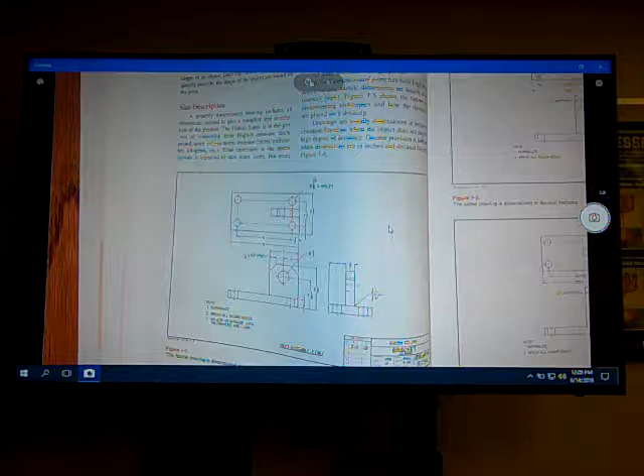Alright, welcome back. Of course, we're going to have a short little video on Chapter 7. Chapter 7 is kind of a big one. We go through quite a bit of content in Chapter 7.

It starts out, as you see on these prints here, there's 3 examples. We'll get to the other 2. They're showing you the different ways that prints can be dimensioned. What I mean by different dimensions, for example, you look at the example here on this page, figure 7.1. These are all in fractions. So it makes it very easy for you to read a tape measure. 3/8 of an inch, 2.5, 1.5.

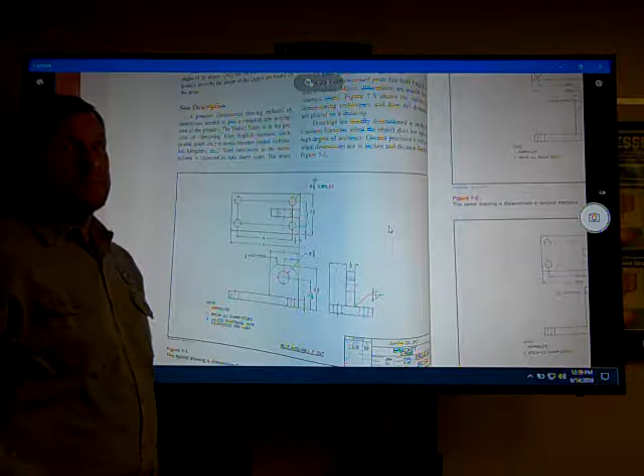You also notice on this simple little print, you see that the diameter of these holes are 3/8 of an inch, and there's 4 holes. So all 4 of these holes are 3/8 of an inch. Also right here you see this half by 45 degree angle. That means it's a 1/2 inch this way, 1/2 inch that way, and it says typical. So what does that mean? That this one here is the same dimension as that one.

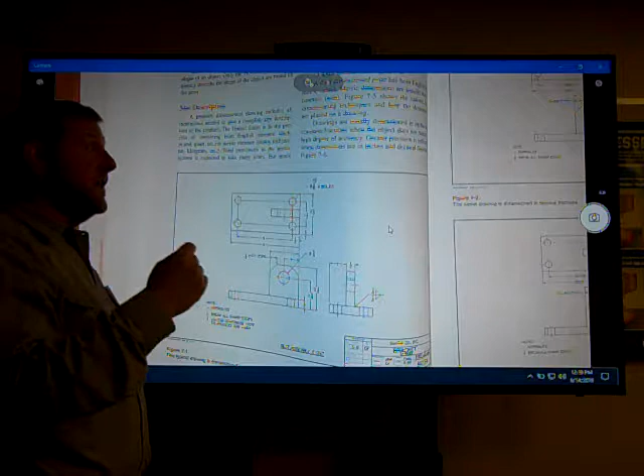When you see that word typical, that means everything else that looks the same is going to be the same as that dimension. You'll see that a lot on your welds. It might be 1/4 inch typical in the tail. You should know that already by your print reading class, and that means that everything on that print will follow whatever's on that reference line or leader. And that applies with other leader lines and extension lines also.

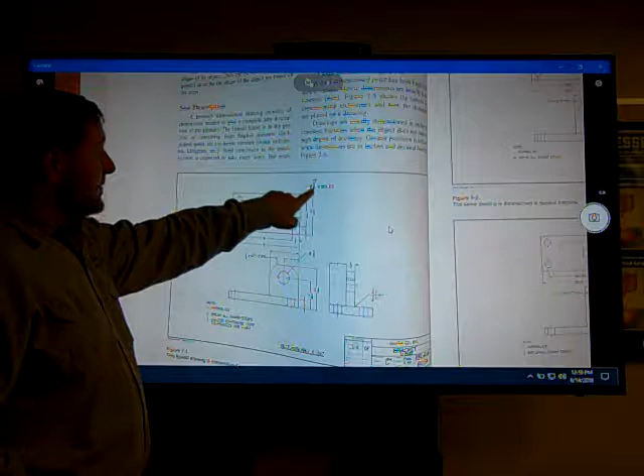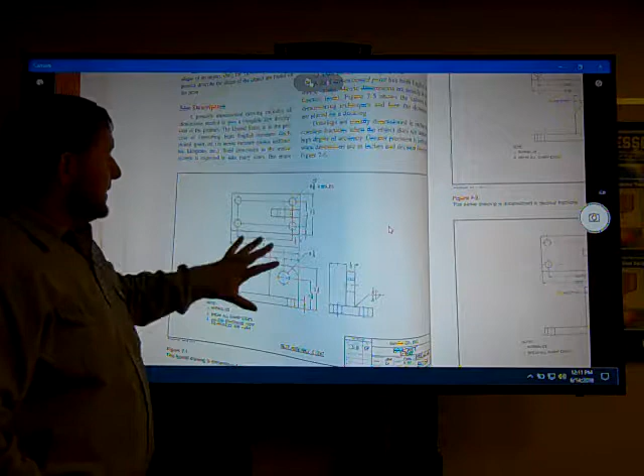So this example right here is showing you that it's using fractions of an inch. Keep in mind that diameter, 3/8, 4 holes, so all 4 of these holes have a 3/8 dimension. This chamfer here, this little notch is 1/2 by 45 degree angle, so it's a 45 degree angle, 1/2 inch both ways. And it's typical, so that means this other side is identical to that side. But this one here is basically depicting that it's written in fractions of an inch.

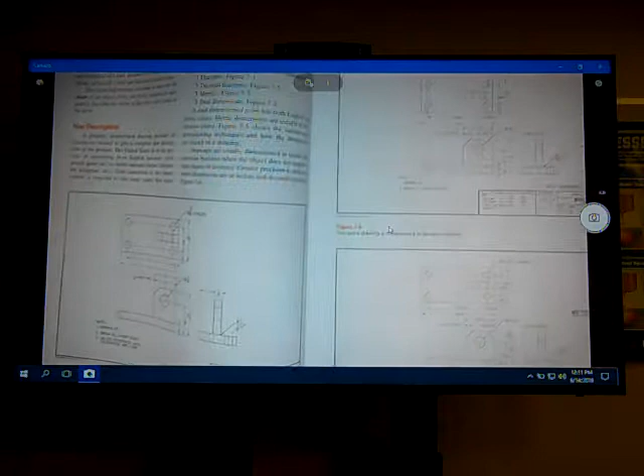As we go on to our next print, up here on top, I'm trying to use examples in the book because that's what you have. We have a ton of examples that we can use, but I figure if I use examples in the book, it should go along with what's being read. So this is the same exact print that's on the other page, except now it's in decimal inches. It's all up to the designer or the engineer to use whatever he would like to dimension. It might be decimal inches, it might be fractions of an inch, however he wants to do it.

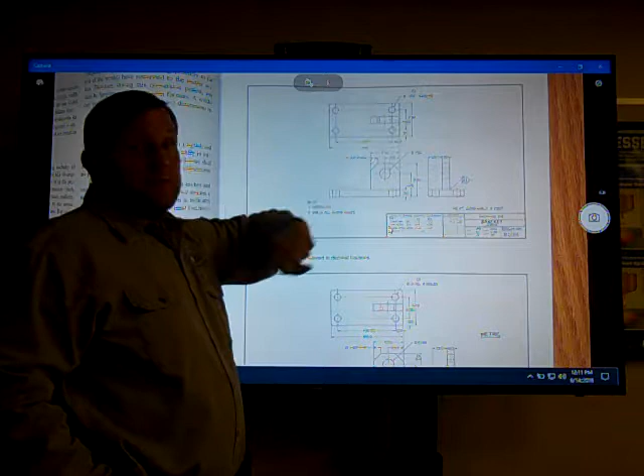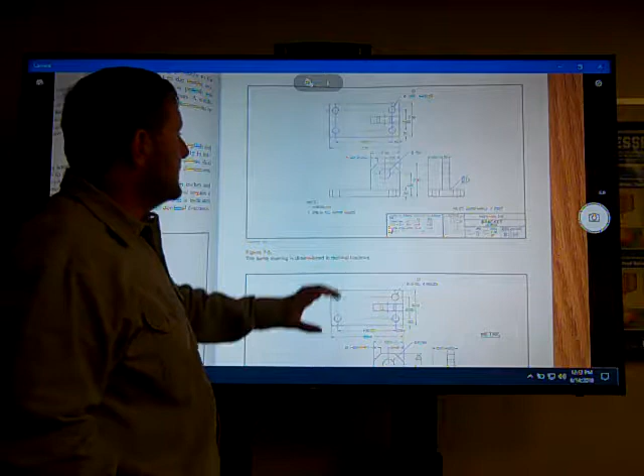So that's why I told you when this class first started to memorize your decimal conversions to fractions of an inch. So this is still 0.375, 3/8 of an inch, 4 holes, same thing applies. Same thing here, instead of having 1/2 as a fraction, they have 0.5. 0.5 is the decimal equivalent to 1/2 inch. So get those decimal to fraction equivalents memorized. You're going to be using them religiously in this class. Some of the prints might be fractions, some might be decimals, and the next example is actually metric.

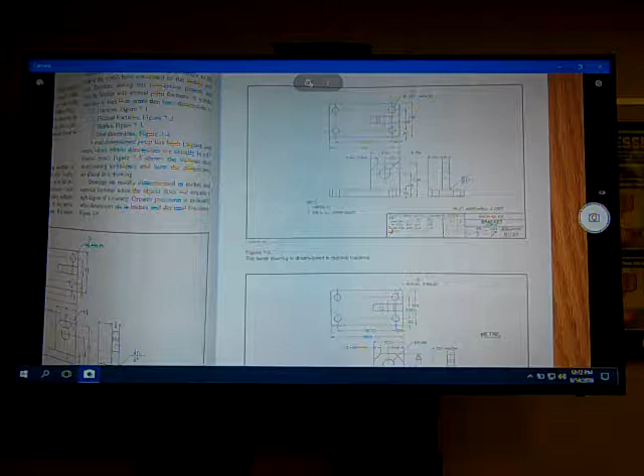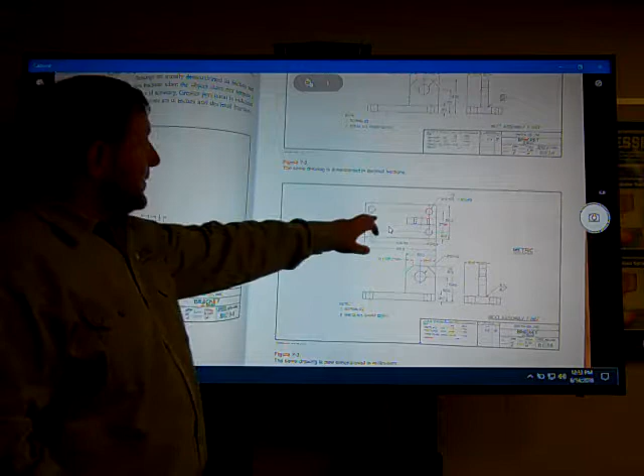So as I move this up, this bottom one here, it's a metric. It all depends on what product you're building and what company you're working for. A lot of our companies in our area use metric because some of their products coming in are out of the United States. So same thing here. So basically what do they have? 10 millimeter hole, 20 millimeters, 37 millimeters. How do I know it's in millimeters? It's usually down in your title block, and we'll get to that later on.

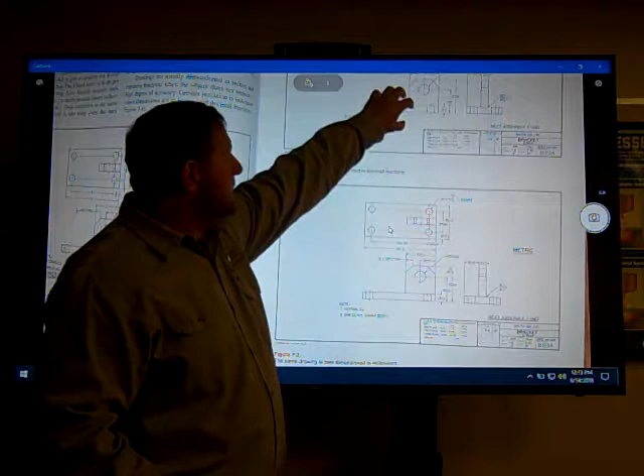But metric, decimal inches, fractional inches. Depending on what company you're working for, you might see all 3, or they might just stick to the decimal. Most of them stick to that decimal equivalent. That's why when you have your decimal equivalent to fractions memorized, it makes it a lot easier on the shop floor.

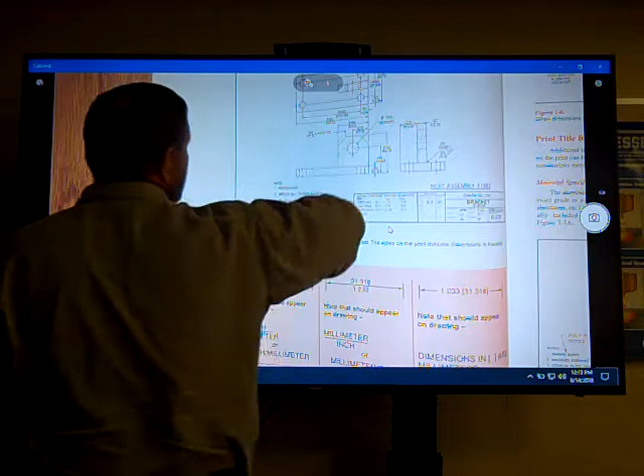The next couple pages we start getting into a lot of the print formatting. This example here on the top is actually an example where they use both. And the very next page, as you can see, they have decimal inches and they have metric right underneath. So that's what they call a dual dimensioning system.

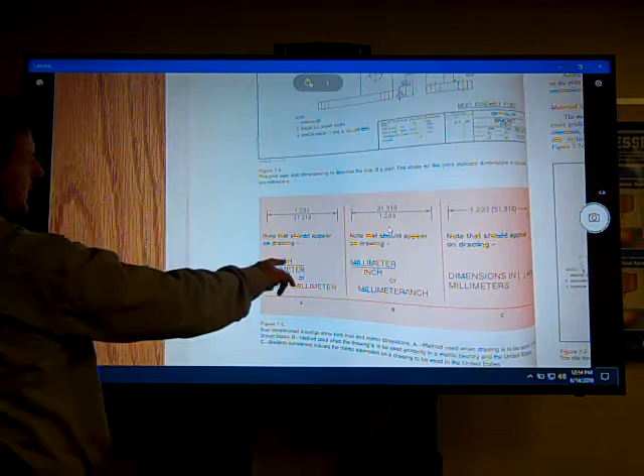When they use the dual dimensioning system, they're going to tell you what is on top. That's what the bottom of the page is telling you. For example, inches on top. So when you see this in the title block, inch on top, millimeter on the bottom. So 1.233 inches or 31.318 millimeters.

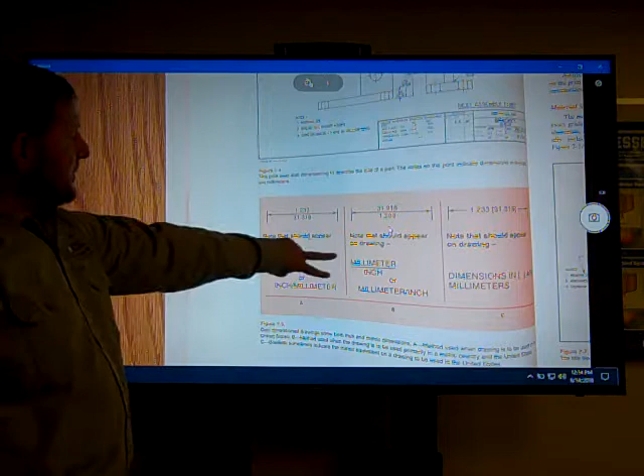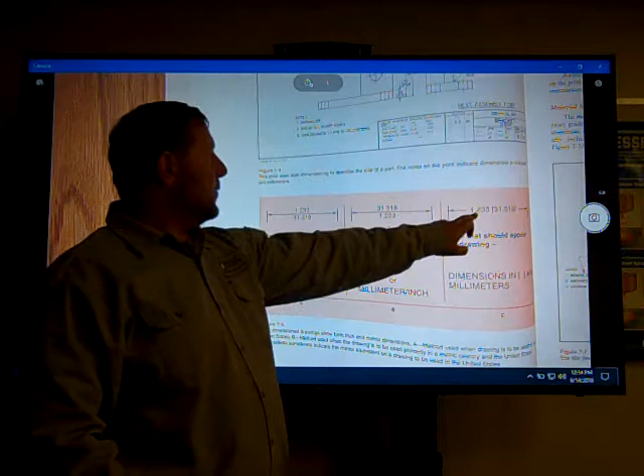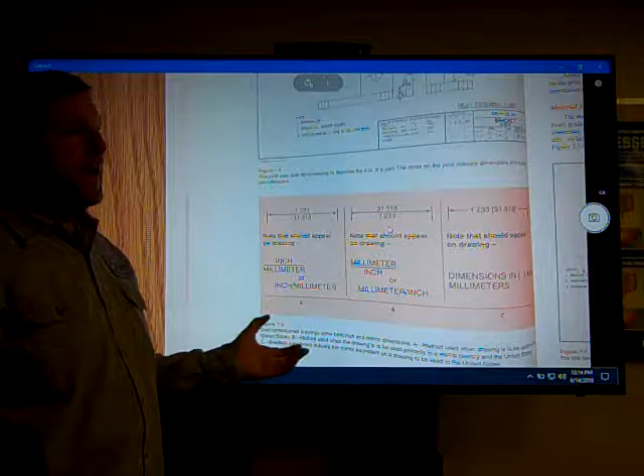Here it's just the opposite. It's flipped. The millimeters are on top, inches are on bottom. Here the dimensions in the brackets are millimeters. So 1.233 is decimal inches. Here is our millimeters, 31.318. It all depends on who's designing that print. They're not all going to be the same. So get used to using different types of dimensioning styles.

Now, as we move on to page 101, you're going to see this bottom down here. I'm going to zoom in here a little bit. Like I said, grin and bear me for a second. This is basically a full print. As you can see, we have our object. It's centered in the print.

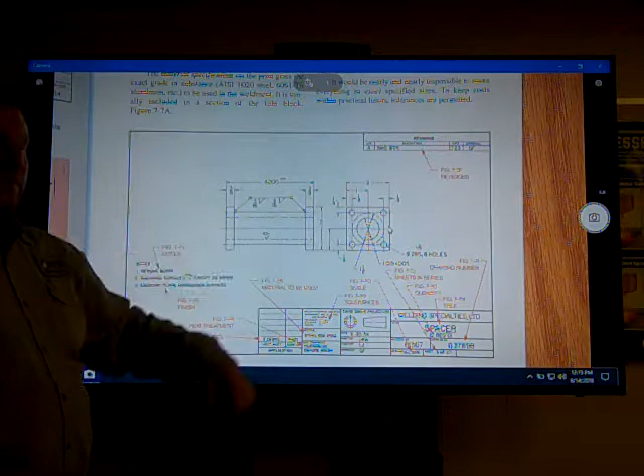Upper right hand corner, we have our revisions. Lower right hand corner down here is our title block. Typically, most designers follow this format, but a lot of the times they don't. Typically, your title block is always going to be in the lower right hand corner. Now, what does all this stuff mean, right? Revisions. Right here. Revisions are something that they've changed on the print.

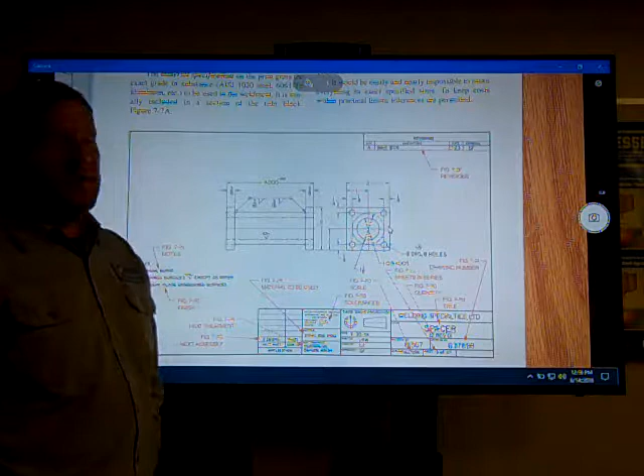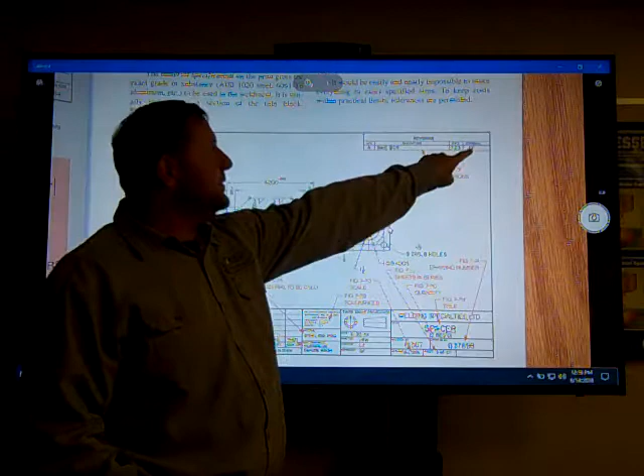So, for example, this is A. A was 1/4 inch diameter. So as you look right here, A, they changed the diameter of the hole to 0.265. So they made that revision. It's documented on that print. It is usually dated and approved. So a revision is something where, as they were making the product, it didn't work. They needed a different dimension. So they put a revision in there for whatever application they had to do.

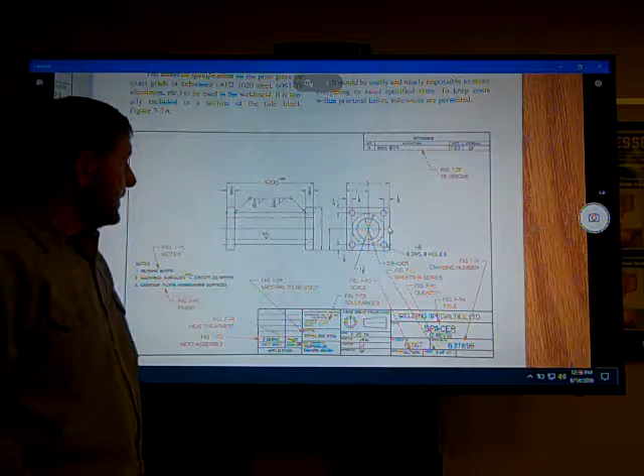So revisions are just changes that they made on the print. So right here, A, that used to be 1/4 inch. Obviously the hole that they had there previously was not big enough, so they increased the size to 0.265. 1/4 inch is 0.25. Alright, what else do we have on this print? Revisions is done. Right here we have a front and right side view. Keep in mind we don't have a top or bottom, so we just have two views. They figured those are the only views we needed for everything on that print.

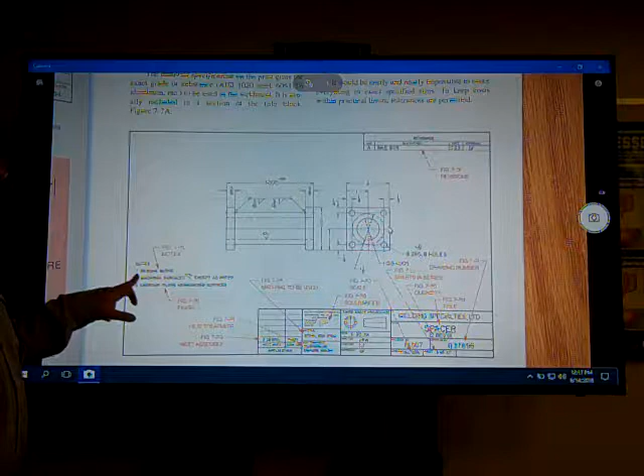Notes. Notes are basically just any additional information that you need. So, right here it says remove all burrs. So when you're done, remove all sharp burrs on that product. Machine surface to 1/8 of an inch except as noted. And it says cadmium plate unmachined surfaces. So these are notes that you might need or may not need when you're fabricating this part. Typically your notes are just additional information for you to finish that product.

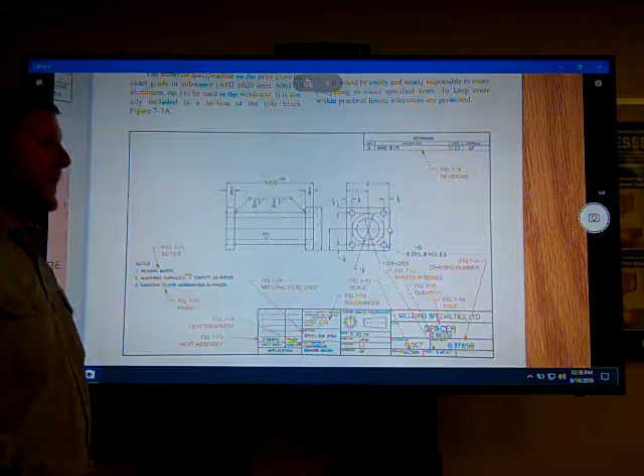Now, title block down here. This is a big one. Understanding this title block means a lot. So, let's start left to right. This tells me right here, next assembly. Next thing right here, heat treatment. Now, title blocks may change, like I said, depending on who's designing it. So, heat treatment is going to be normalized before machining. So, they're going to soften that material, make it easier to machine. They might have a hardening process after it's machined. But this title block is going to tell everything you need to know about that object.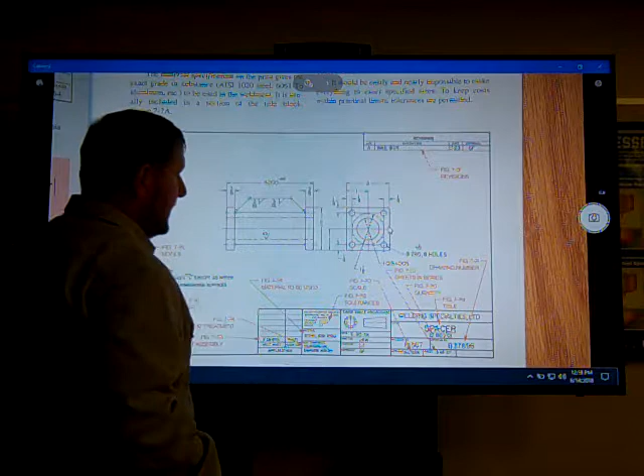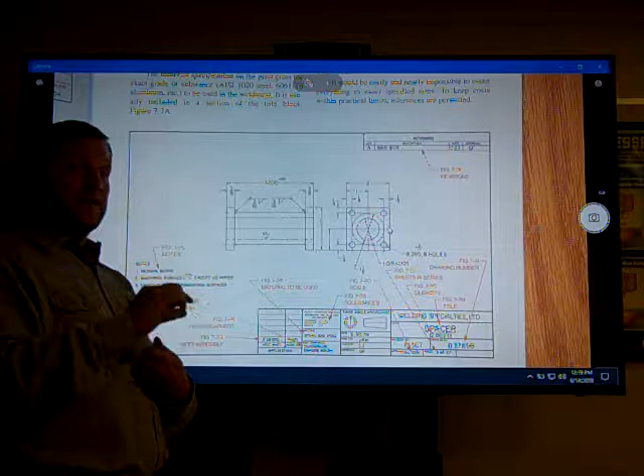Material. This is steel AISI 1020. So it's telling you material. As you get right here, it's going to tell our tolerances, kind of hard to see on here. To explain a tolerance, it could be a plus or a minus or just a plus. So for example, if I had a dimension that was 1/4 inch plus or minus 1/16. So 1/4 inch, you add 1/16, so that's 5/16. Subtract 1/16, so that product could actually be 3/16 to 5/16 actual size.

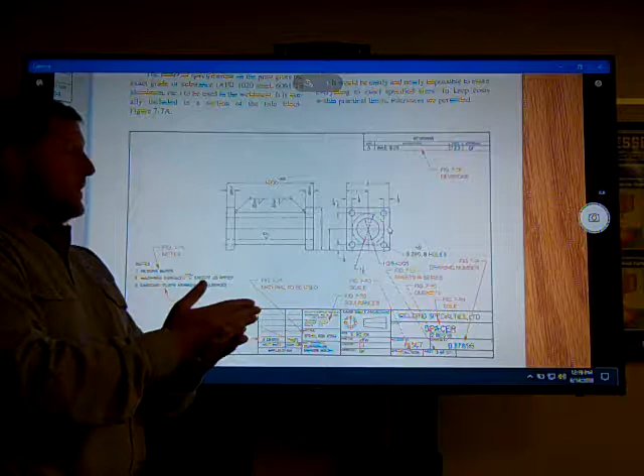So plus, you go up, minus, you go down. Some of them are only one way. It might be just minus 1/16. So the range of that product, if it's just minus 1/16, would be 3/16 to 1/4. Or if it was just a plus, just the opposite, it could be from 1/4 to 5/16. But it gives you a range where that product can fall within.

It is very rare when you fabricate something that it's going to be exact, because we have heat going in there, expanding, contracting, distortion. So they give you a tolerance that it can be in. So that's your tolerance. So as you go into your title block, very hard to see here. I'm going to go over here and take a little look.

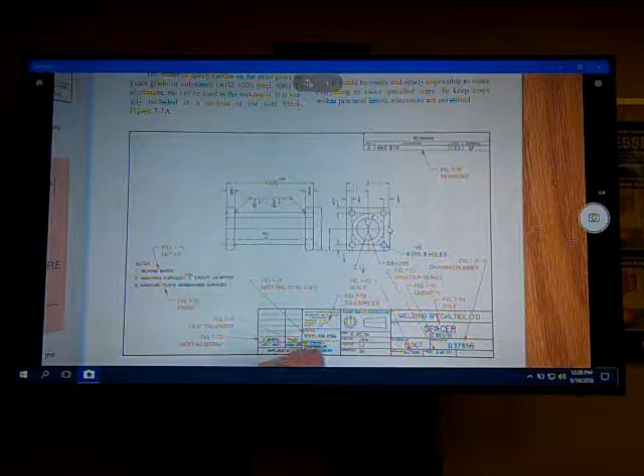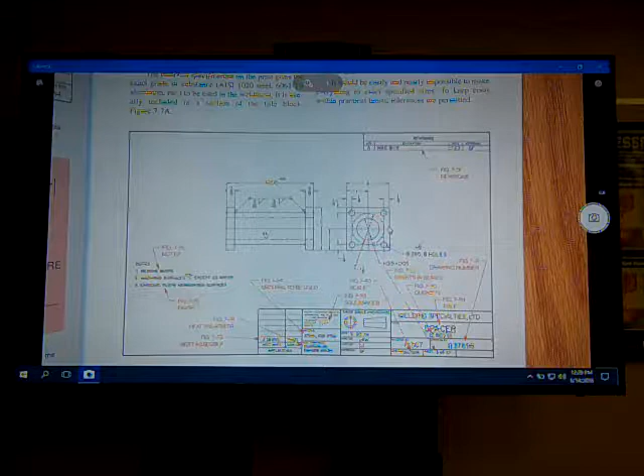Okay, it says plus or minus a 64th for your fractions. Decimals, looks like it's up to 10 thousandths of an inch. Angles are, let's take a look over here quick. My eyes are getting bad, I'm getting old. It's plus or minus 1 degree.

So, anything that's in fractions, there is plus or minus a 64th. Decimals, up to 10 thousandths of an inch. Remember, tenths, hundredths, thousandths. Angles are plus or minus 1. So that's a tolerance. It's a range that it can fall within and be acceptable.

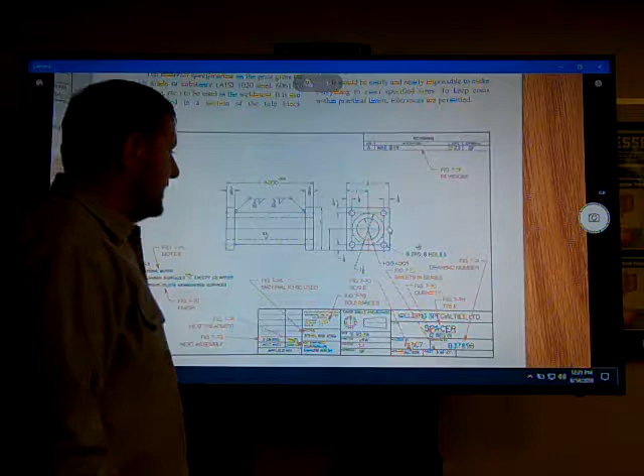What else do we have on this title block? It's a third angle projection. You should know that from chapter 4. The date, who made it, who's checked, and who approved it. Also, what else do we have on this title block? Probably the company. What the product is. This is a spacer. And it also tells you right underneath there 2 required. So we actually got to make 2 of these.

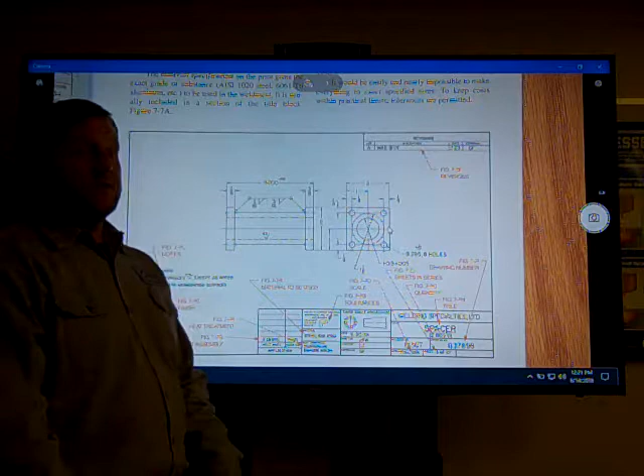Revision number, drawing number is critical because a lot of times you get into these prints, there might be 35 pages to that. It says sheet 3 of 7, full size, so the scale is full size. So this is the actual size of that object. 4 inches overall length, plus or minus 5 thousandths.

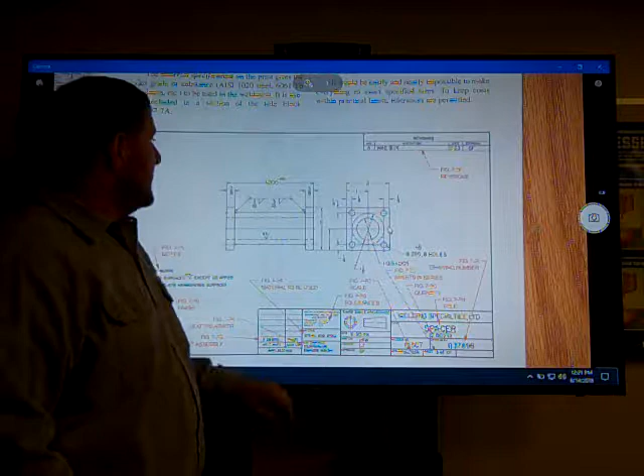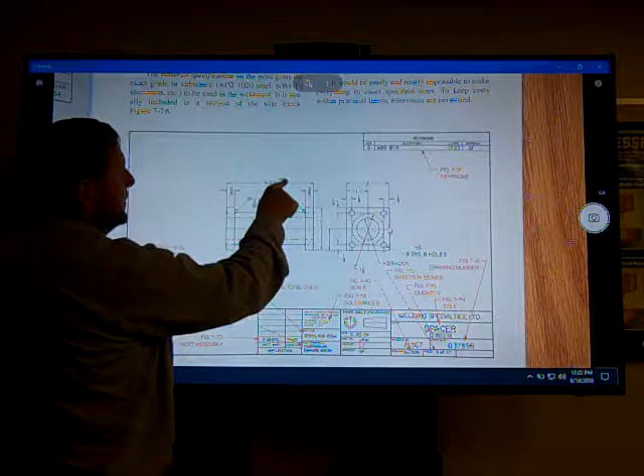Now this right here, when you see this on a print, they call this the general tolerance. So anything that you see on here follows that general tolerance. And if you look at this 4, it has a minus 5 thousandths of an inch. That is a direct tolerance. So that tolerance is only applied to that dimension. Anything else on here that does not have that, you follow these general dimensions. Same here. We have 1.015 plus 5 thousandths. That tolerance only applies to that dimension.

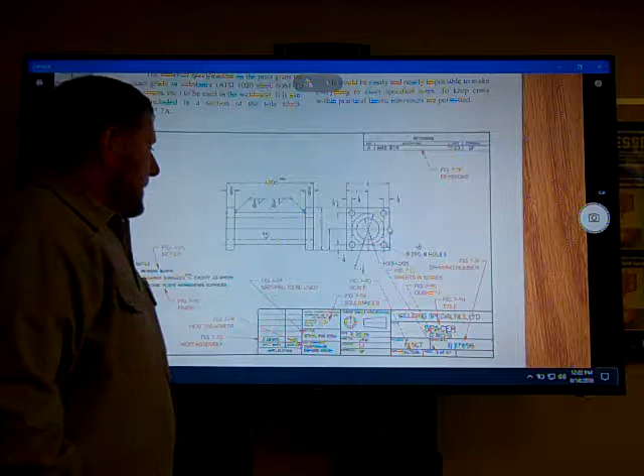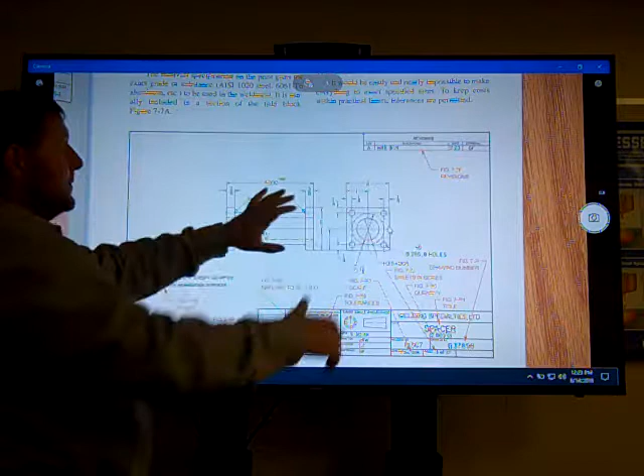Alright, scale. We'll talk about scale for a little bit. What is scale? This would be a 1-to-1 scale because it's actual size on the paper. Or 1-to-2 or 2-to-1. So when you get into scale, that does not change the dimensions on the print. Every dimension on the print is true. When you get into scale, it models it down. For example, if this was a 2-to-1 scale, 2 inches on this paper would represent 1 inch in real life, or 10-to-1. Because a lot of times you get into these bigger products, they're huge, they're not going to be able to fit them on a sheet of paper, so they scale them down.

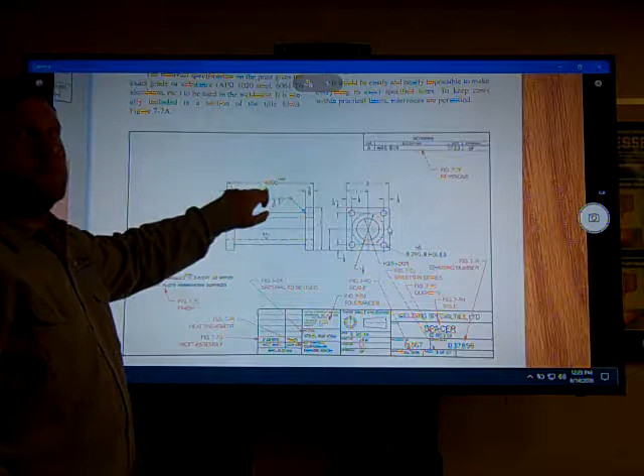And it could be the opposite, where they got something really small, they scale it up so you can see it. So that's what scale is. Don't get too wrapped around the scale. You follow the dimensions, because I've had students in the past, they'll say, well, it's a 2-to-1. 2 inches on here equal 1, so they start multiplying everything by 2. No, the dimensions on the print are true. Scale has nothing to do with the dimensions. The scale just is telling you the size of the object related to what it is in real life. So don't get wrapped around the scale too much.

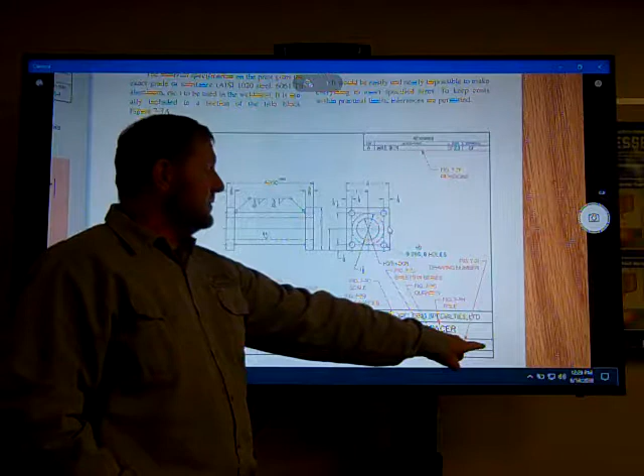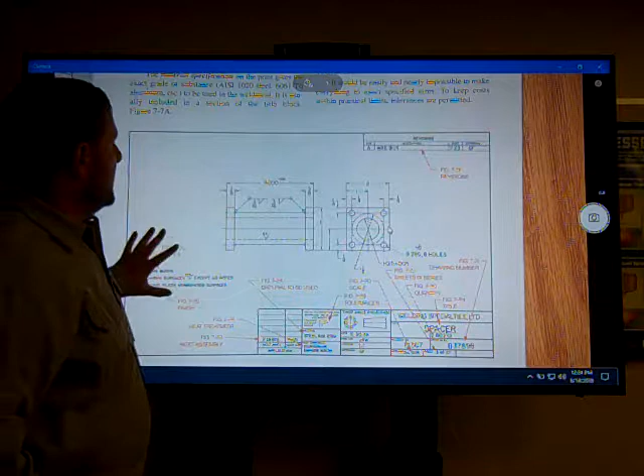So drawing number is really critical too. Make sure your product matches your drawing number. Because, like I said, when you start getting into multiple sheets, there might be different views of that, and they'll go back to that drawing. This is drawing number, sheet number 4. Same drawing number, just a different sheet. So kind of go through here, go through the book, follow this formatting. This is typically a very basic print. Your title block is going to give you a ton of information. Make sure you follow it.

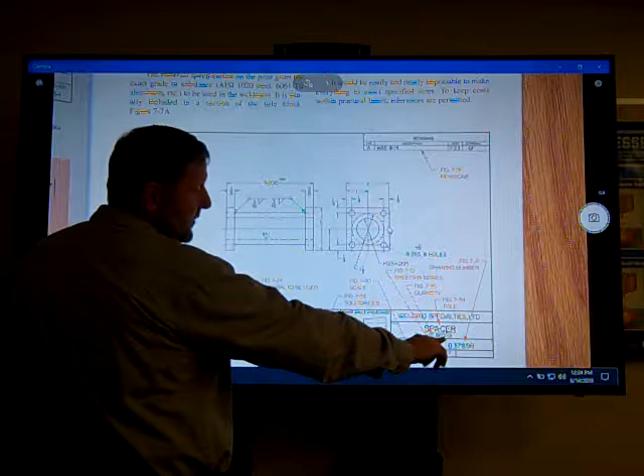The main thing that I would probably focus on is the title of it. This is spacer, how many are required. Make sure you follow your drawing numbers. These tolerances right here are really important. These are your general tolerances that apply, unless there is what they call a specific tolerance given to that direct dimension.

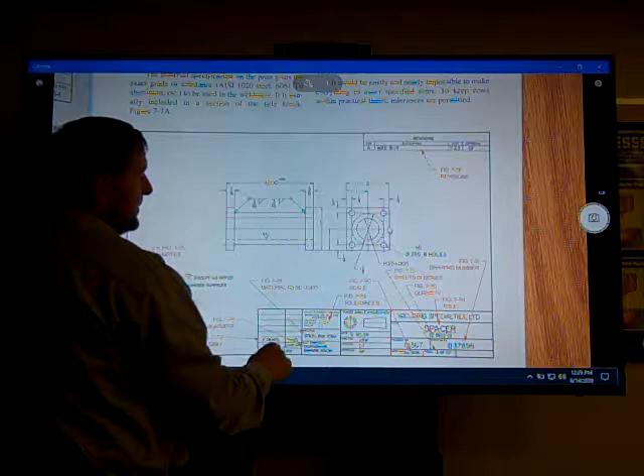So for example, plus or minus a 64th, this is 2 inches. So this could actually be 1 and 63 64ths or 2 and 1 64th. It can fall within that range. So follow these tolerances, understand them. If you have questions, I cannot stress that enough, contact your instructor.

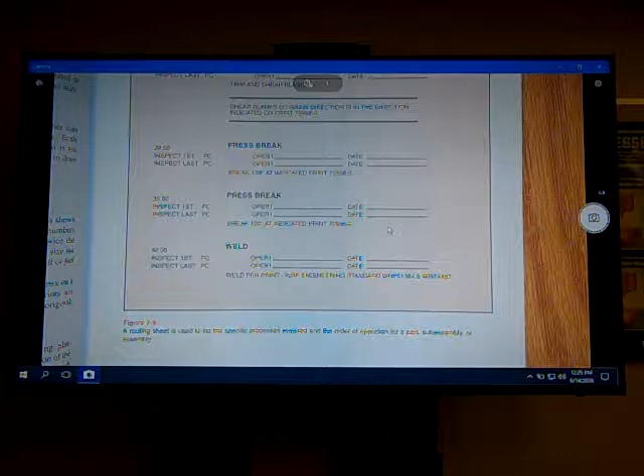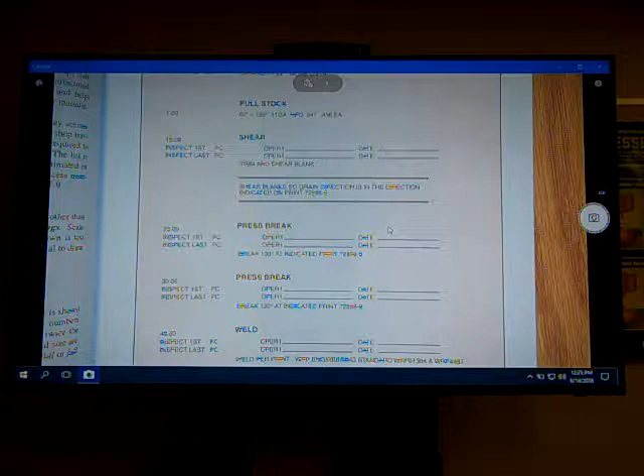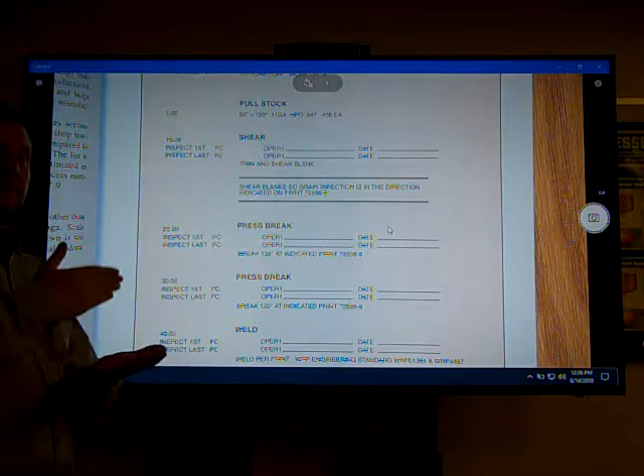As we continue into our print formatting, as you're going through, this is what they call a routing sheet. Right here. This is a very basic example of a routing sheet. Now, you notice there's no print. There's no object. A routing sheet is designed to give you a step-by-step procedure of putting that product together.

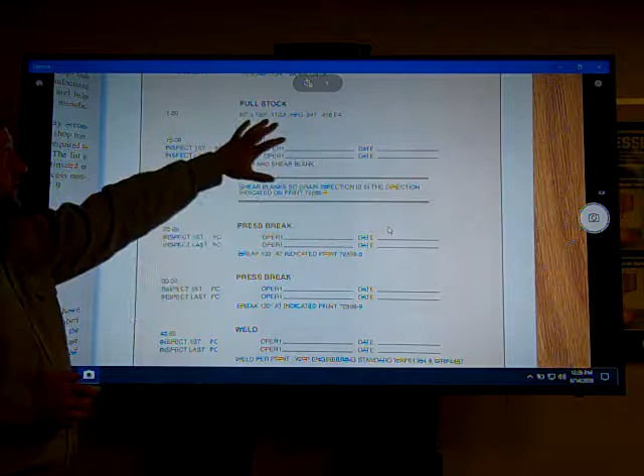So the very first step right here, pull stock. So you're going to go up on the shelf, grab this 60 inch by 120 inch 11 gauge, blah blah blah, and then you're going to shear it to a specific size. Every step of that routing sheet has to be completed. So a routing sheet is basically a step-by-step procedure to walk you through putting that product together.

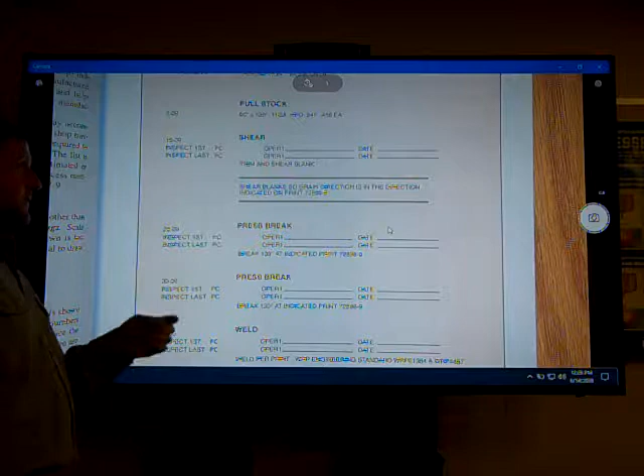Some companies also get into detail where you might take part A, tack to part B, take part C, tack it to part B, and it's going to tell you a step-by-step procedure of how to put that product together. That's what a routing sheet is. I call them routing sheets.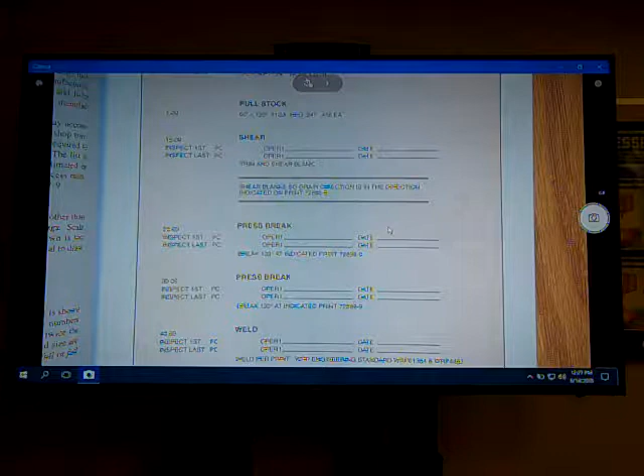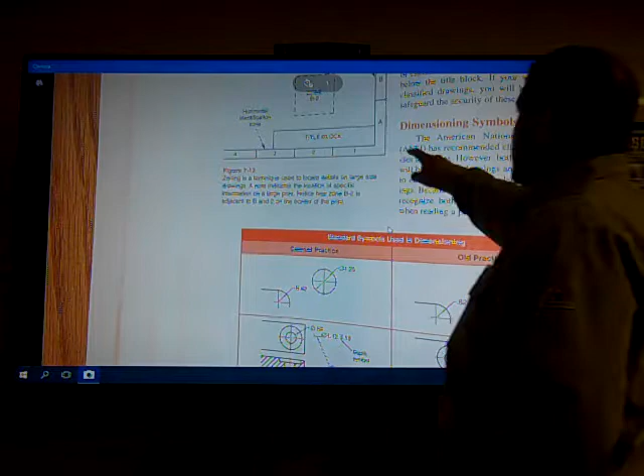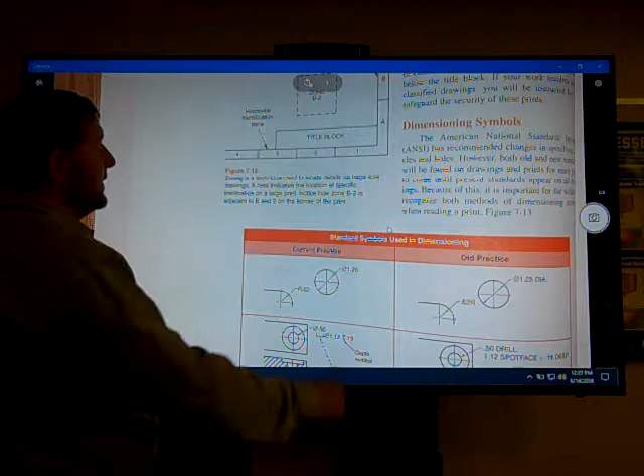So what else you might see in a print? Is what they call zoning. As you can see up here in the top left-hand page of your book, here's an example of zoning. Any of you that have looked at a plat book, it's identical to a plat book. So on the print, they'll say, go to B2 to find this dimension. So on some prints, they'll have letters or numbers going either way, it does not matter.

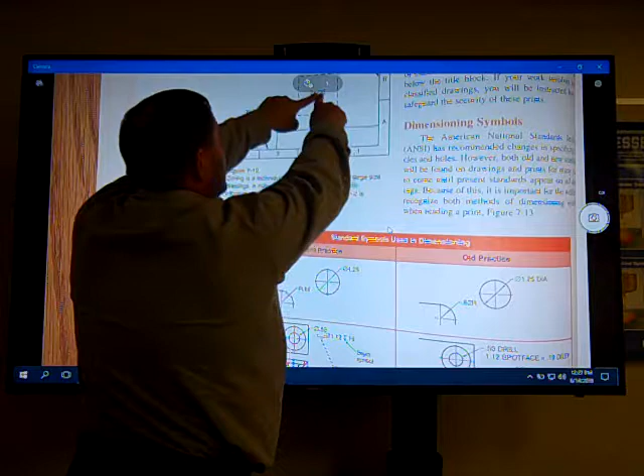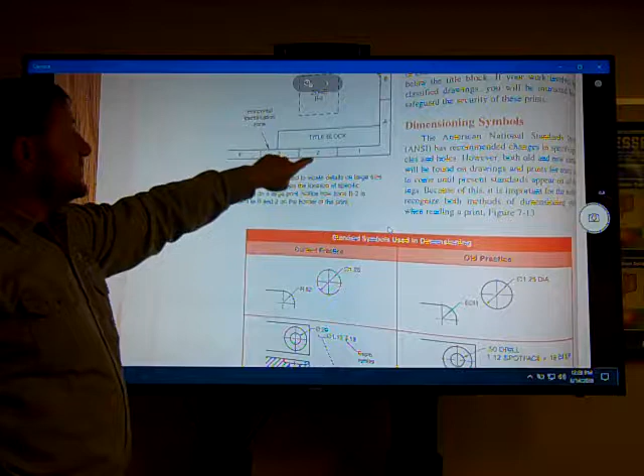So we go to B, we find 2, we come out, we meet right here. So here's zone B2, you should find that dimension in there. Your final exam is going to have examples, and you're going to have examples in your test. It's going to say go to zone 1A, or it might be 1C to find this dimension. So that's what that is all about. That's what zoning is.

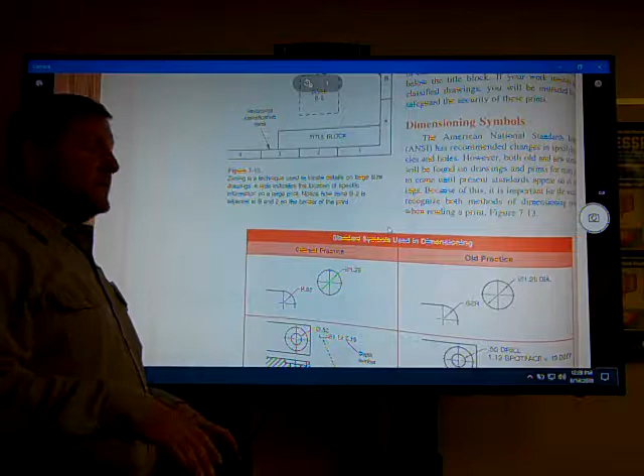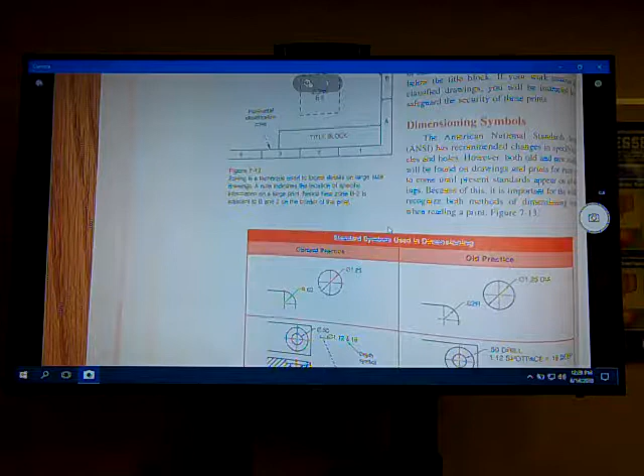So as you can see in this chapter, we're going through a lot of the formatting, the print, the title block, zoning, heat treatment, things like that. Don't get too alarmed. Everything is going to be given to you. You just have to find it. You just have to know where to look on the print. Also in this chapter, they're going through some different ways of how things are dimensioned. Now, this depends on your company. Strictly on your company. Some use old prints, some use new prints.

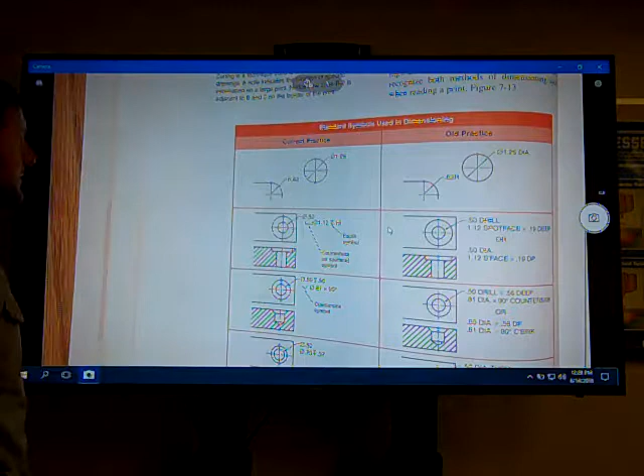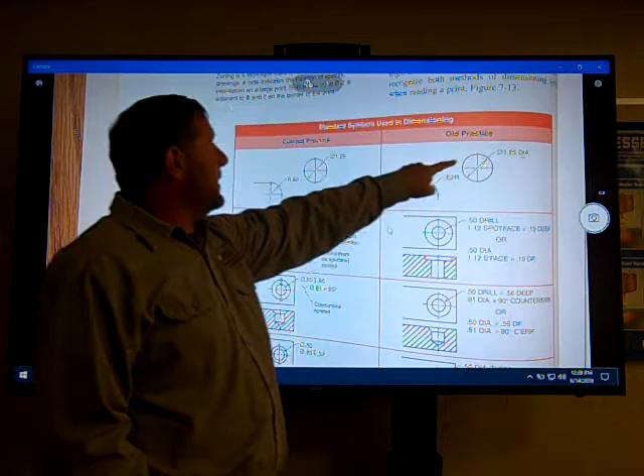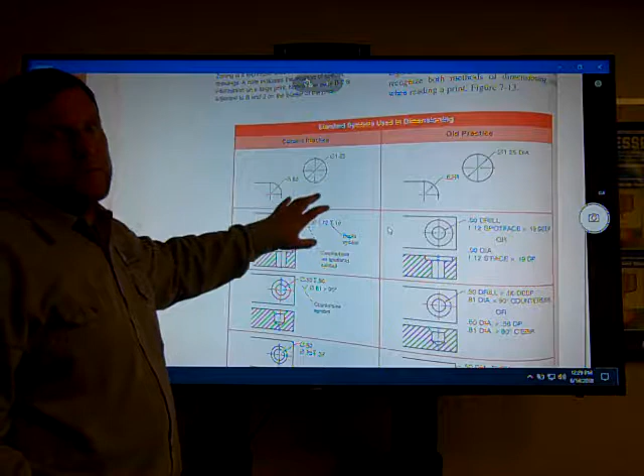For example, old practice, you used to have diameter 1.25 and they'd write DIA for diameter. Current practice right now is this, the diameter symbol right here. So this right here gets more into machining. That's something that you would have to probably concentrate on. But these are just current practice, old practice. You're going to probably see a little bit of both. So go through that.

So this chapter we hit on a lot. Go through the book, follow this little lecture, go read through it, go through the examples in the book. Hopefully this helps clear up a lot of the print formatting. So as we go back, you understand the title block. It's going to contain a lot of information that you need. The type of material, your general tolerances are very important. Things like that. And at any point in time, make sure if you're confused, you contact your instructor.

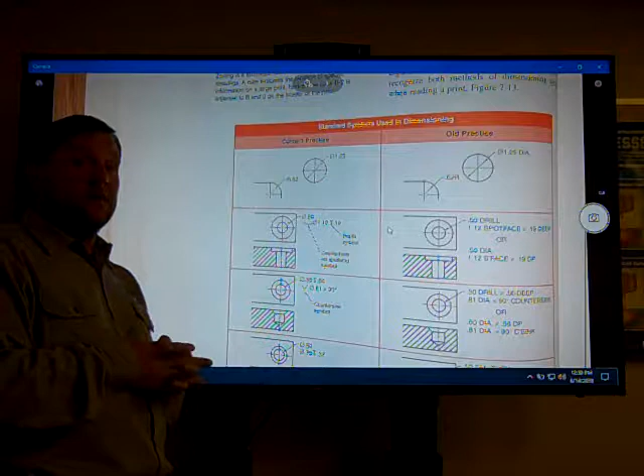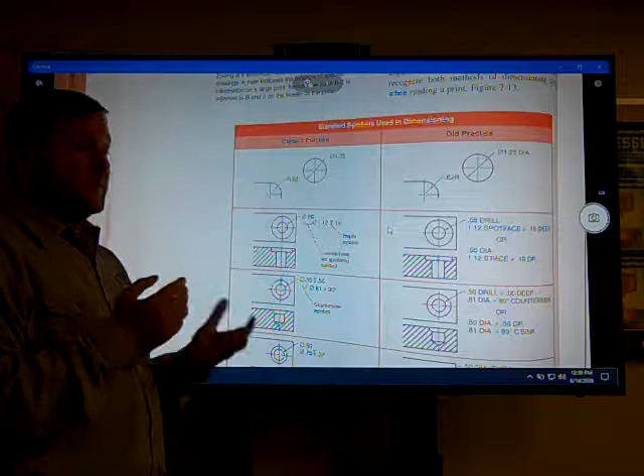Now we're done with chapters 4 through 7. You're going to have a test. When you're ready to take that test, make sure you contact your instructor. It'll be a written test. It's not going to be online. Because of all the prints that you're going to be looking at, it's going to be hard to get them in on an online format. I find it simpler for students to just do paper and pencil. It seems to work a lot better. You got the print right in front of you. You got the question. You can look up the answer, whatever you need. But if you have any questions, make sure you contact your instructor.

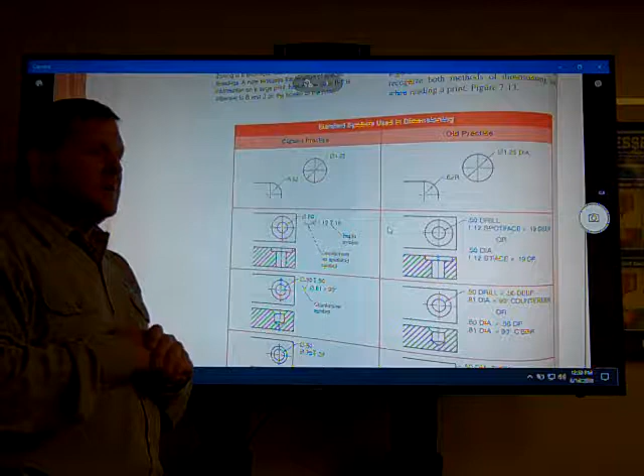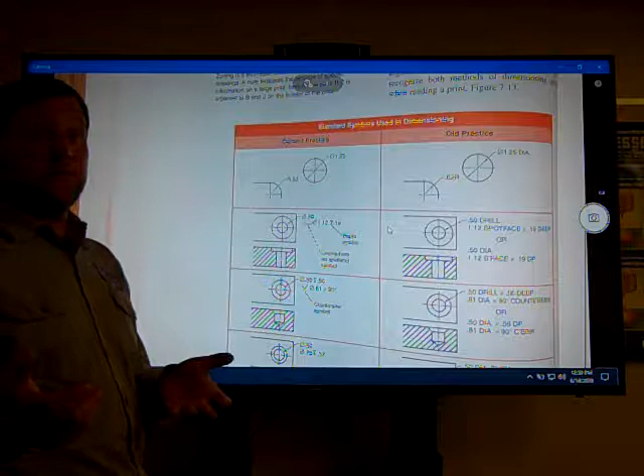And keep in mind, we're always going to have a little lecture time set aside. We'll have it hanging out in the hallway or in the welding lab. For example, it might be from 1 to 2 on Tuesday afternoon. We'll do a print reading lecture on whatever needs to happen. So take advantage of it. Our main goal here at Nicolet College is to make you successful. And that's what we want to do. So we can't help you unless we know that you need help. So, all right.